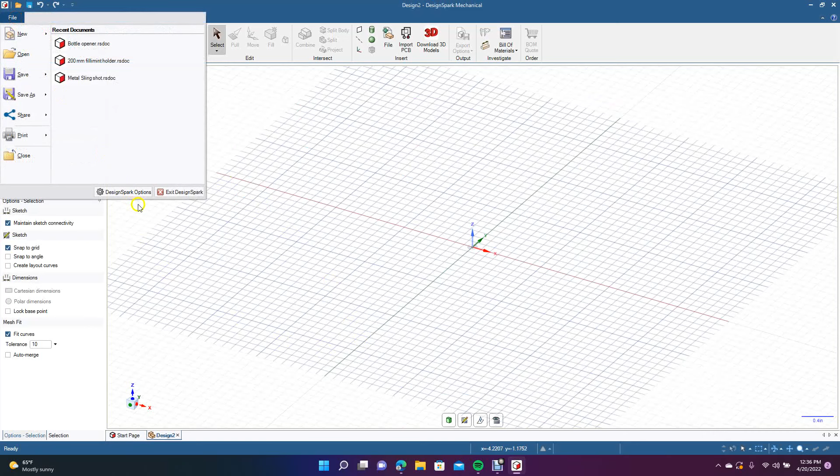Okay, so we're going to go ahead and create this in inches. We'll go ahead and go New Design. We're going to come up here, back to File, go down to DesignSpark Options. We're going to navigate over to Units and make sure that this says inches here, Imperial. So we'll go ahead and click OK.

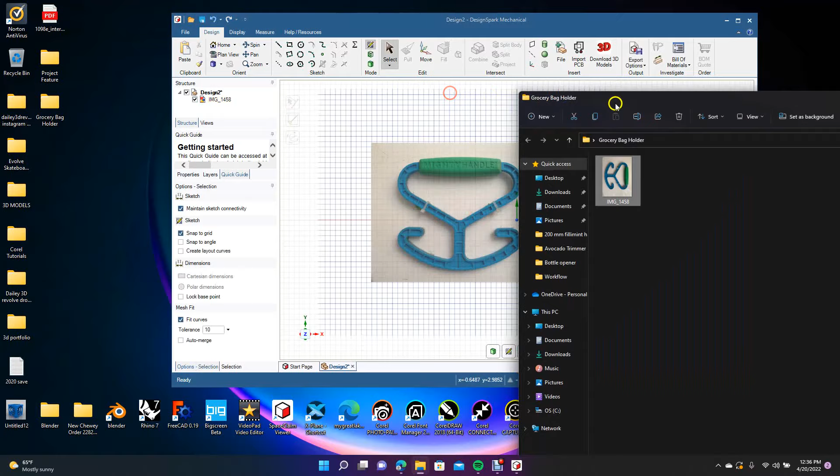We're going to click this eye icon, or V on the keyboard, to go to Plan View. I'm going to minimize. I have a photo of the one that I'd like to kind of use as a guide. I'll be taking measurements from this. Not going to make this exactly like this one, but it is going to be similar.

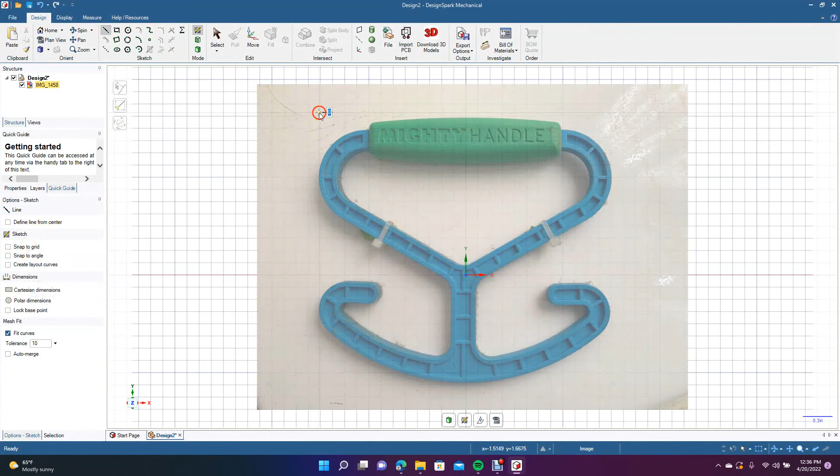Okay, we want this to be 5.75 inches from here to here. So we're going to go ahead and get a line tool. Let's turn off the snaps. And then we're going to go ahead and click there, and then we're going to drag out and type in 5.75. That's how big we want the handle to be.

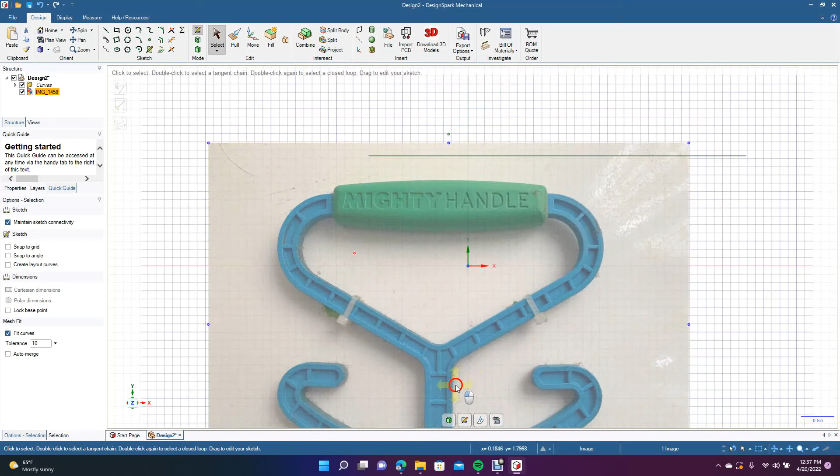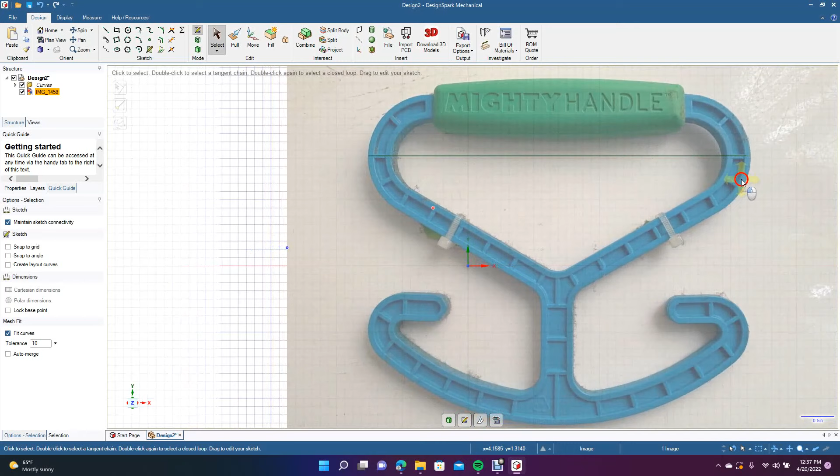So now we're going to click on the actual photo. We're going to come over here to the node on the lower right corner. We're going to click, hold down Shift, and we're just going to drag that out so it's close to the size that we need it to be. Okay, need to be a little bit bigger, so we'll click, hold down Shift, drag. Now make it a little bit smaller. Okay, I'm okay with this.

So go ahead and get rid of that reference line. We're going to click and drag this close to the center there. Click off of it. We're going to go Control minus on the keyboard to zoom out.

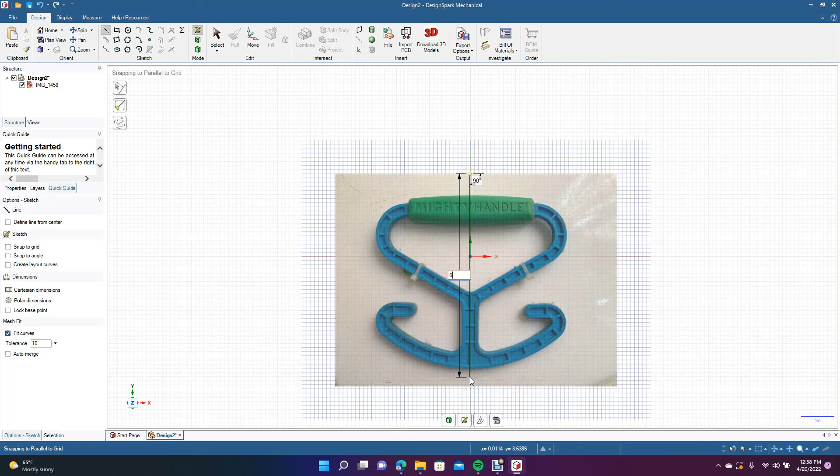We're going to go ahead and get our line tool. We're going to come put a line in here, straight down the middle. Doesn't matter what size, but if you're following along, we can go ahead and make that 6 inches. And then we'll click, select, click off. Now we're going to right mouse click on that line and set as mirror. Now we'll Control plus. Go ahead and get our pan tool.

So what we're going to do is go ahead and just start recreating this. Thinking it's just going to be best if we use a line tool. So we'll go ahead and start there. We'll go ahead and go...

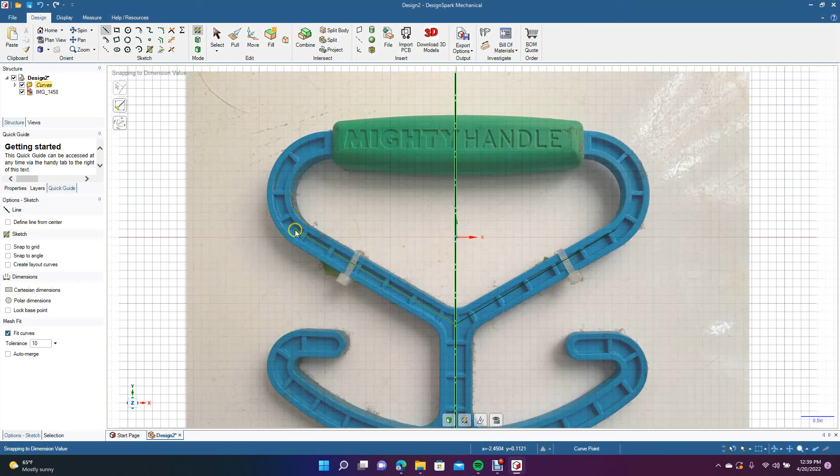2.827. Then we're going to click there, 2.827, enter. And then we're going to come straight up to here, top, which is going to be 1.328. And we'll click there. Then we're going to come across to here. Okay, now we have the start of this.

So now what we're going to do is go ahead and get our 3-point arc. We're going to go from end point there to end point there. And then we're going to curve this a little bit. This is going to be 112.9 degree, and the radius of 0.797. So we'll hit enter there.

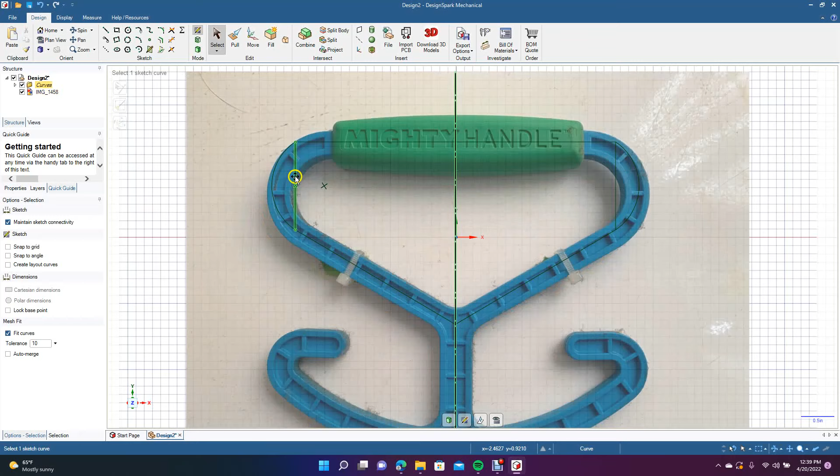Select, click off. And go ahead and get rid of this line here. Don't need it. We're going to add one more 3-point arc line. So we'll go ahead and grab that 3-point arc. We're going to come from this point here over to... actually, let's select, click off.

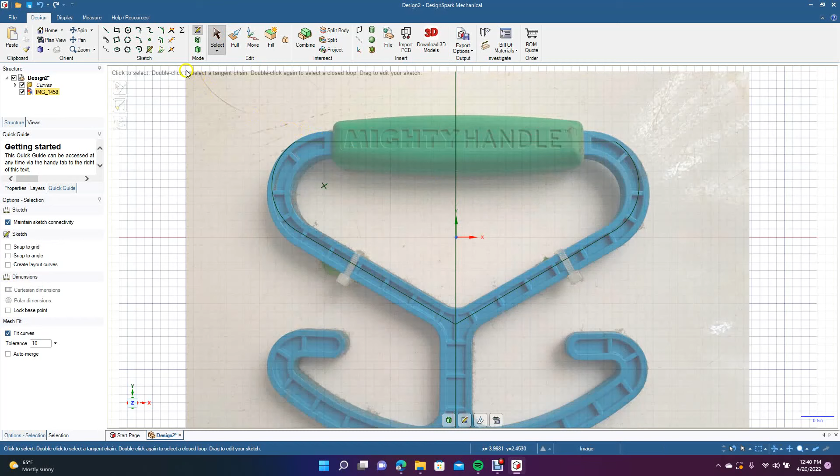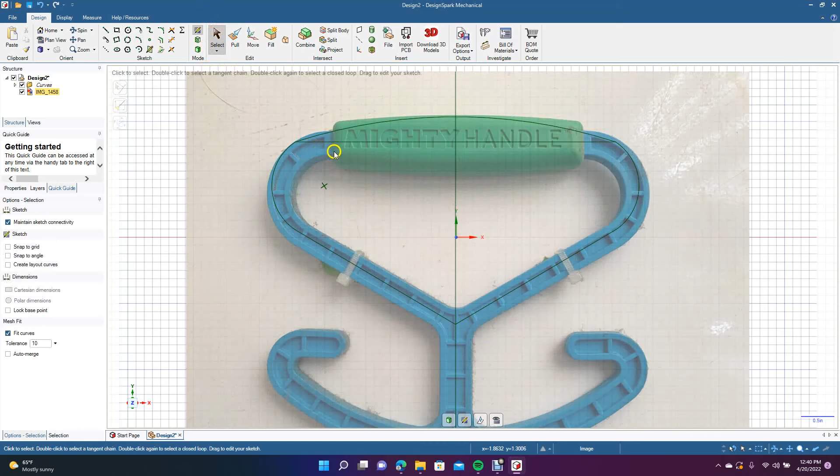We want to right mouse click on that and just turn off the mirror for now. Get our 3-point arc. We'll go from endpoint over to the endpoint of this. And then we're just going to arch that up a little bit. We'll have a little bit of a curve to ours. It's going to be 35.5 degree angle, and the radius is 8.004. We'll hit enter. And then we can go ahead and get rid of this line down here. Don't need those.

Okay, now we're going to go ahead and turn that back on the mirror. So we'll right mouse click, set as mirror. Now we're going to pan up.

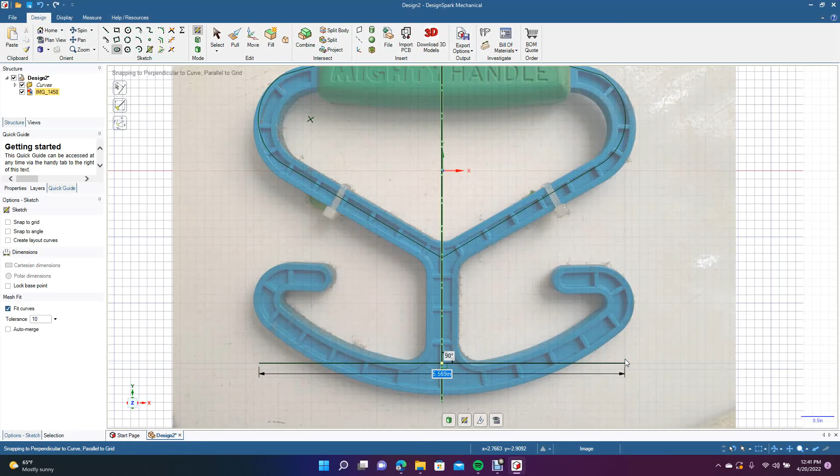Now we're going to go ahead and create this bottom part. The best way to do that is probably with the ellipse tool. So I'm going to go ahead and create an ellipse somewhere around here, just drag this out. 90 degrees, and we'll go 5.6 - type in 5.6, enter, and then we're just going to drag up.

We're eventually going to move this, so we'll go ahead and go to there, which is 5.6 and 2.798. So we're going to go to move. We're going to select that circle that we just drew and drag that up. Right there is probably good. Select, click off.

Now we're going to go ahead and put a line in here, from right there across. Select, click off. We're going to get our trim away tool, which is this trim away up here, or T on the keyboard, and then we're going to go ahead and get rid of these. Don't need those.

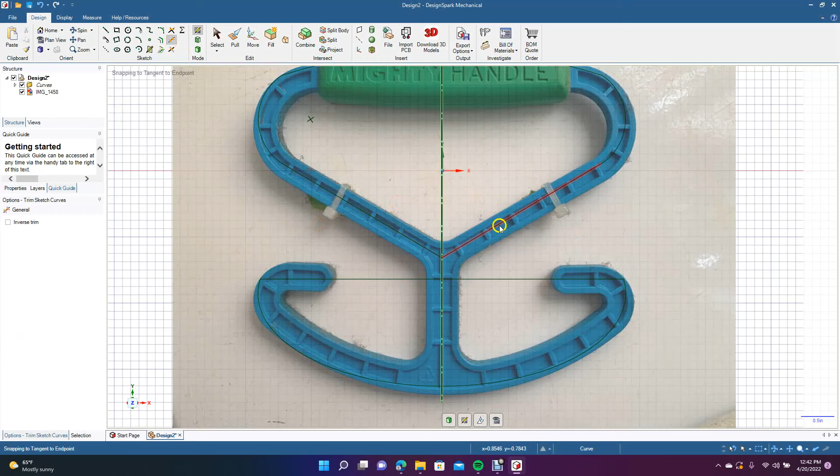Okay, now we're going to go get our 3-point arc again. But before we do that, just click on this line again and turn off set as mirror. And then get your 3-point arc. Now we're going to go from here over to the end point there, and then we're going to curve this a little bit.

I think that's good there. Select, click off. I'm going to get rid of this middle line here, so delete. Okay.

Now we're going to go ahead and let's put another line in here. So we'll go ahead and grab a line there. Actually, let's undo this. Undo. Okay, go to there. Select, let's click on that line there.

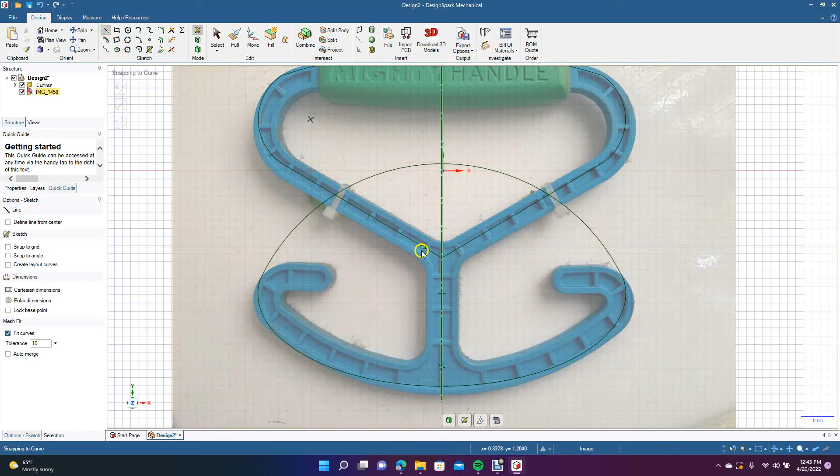Right mouse click, set it as mirror again. We'll get this line to line here, and we'll come from there straight down. 1.921 inches and 59.6 degrees. So we'll go ahead and select, click off.

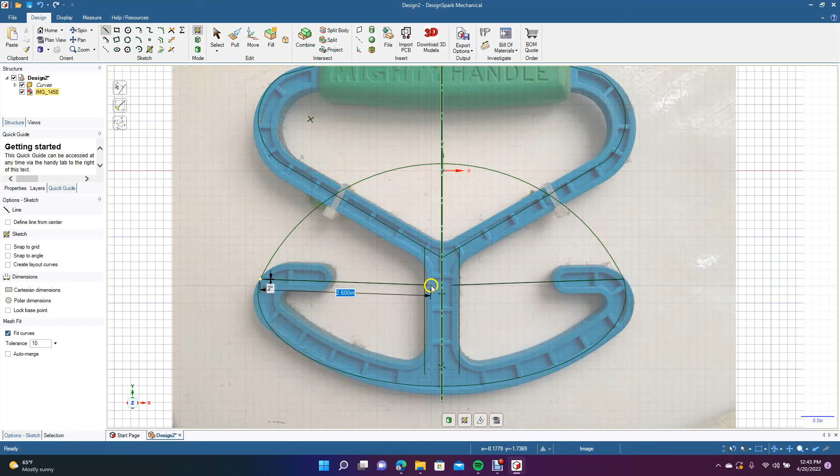All right, now we're going to start actually doing some of the work. So we'll go ahead and put a line from there over to there. We're going to get our trim away tool. Let's trim away this up here. Don't need that.

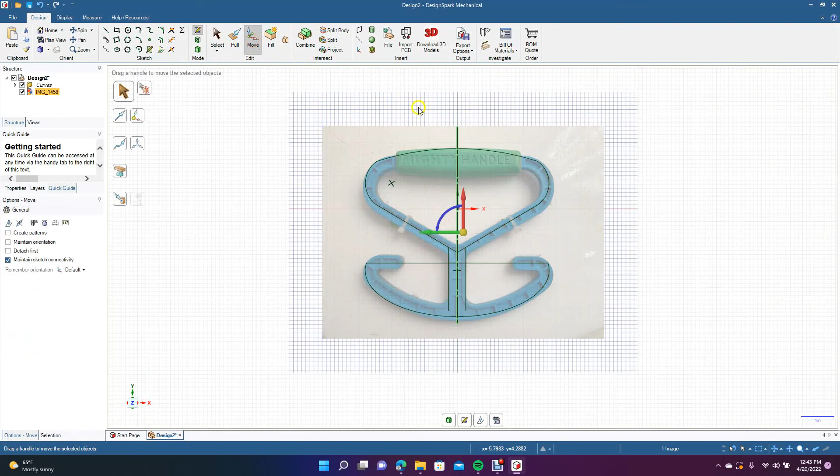Yeah, okay. Now we're going to go ahead and let's Control minus. Let's move this out of the way. So we'll click on the actual graphic, hit move. We're going to grab this green, just drag it over.

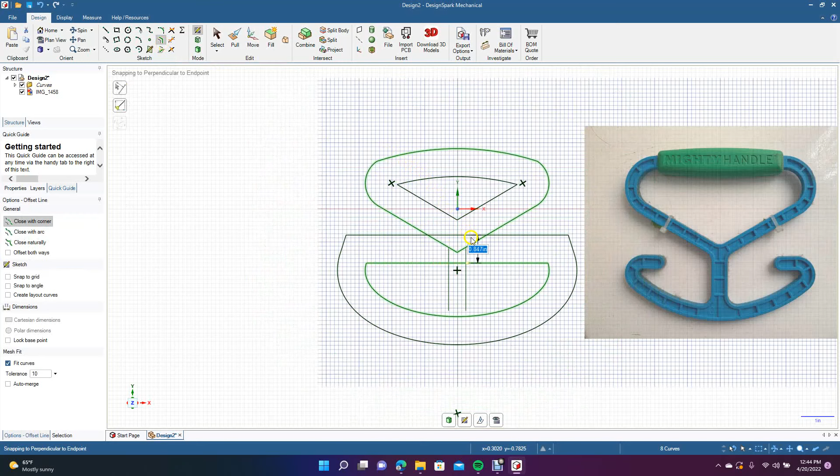Okay, now we're going to get rid of this mirror line. We don't need it. Now we're going to go ahead and select everything, and then we'll deselect these two lines here by holding the control key down. We're going to come up here to offset. Okay, and then we're going to offset this. I think an offset of 0.4 would be good. So we're going to type in 0.4, hit enter. Okay.

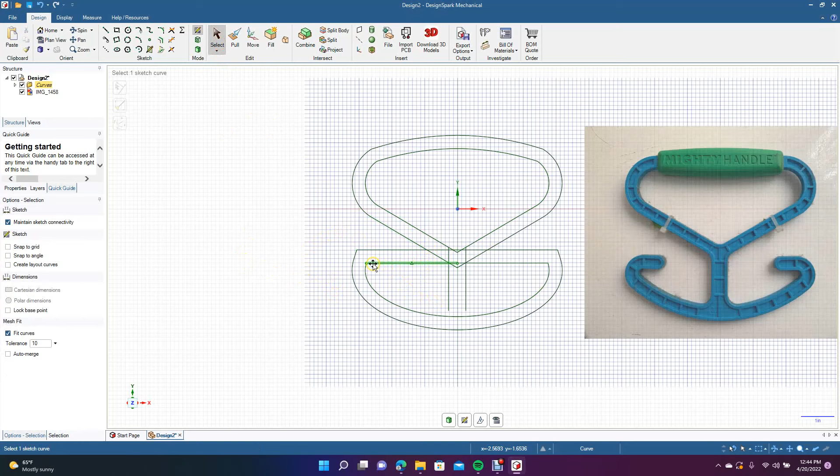All right, this looks pretty good right here. So what I'm going to go ahead and do is we want a little bit of this piece here. So let's get our trim away tool. Let's start trimming away the stuff we don't need.

Let's undo that - you just undid one I needed. And these I actually needed too. So let's go back, undo. Undo back to here. Sorry about that. I accidentally deleted these lines here and I needed those.

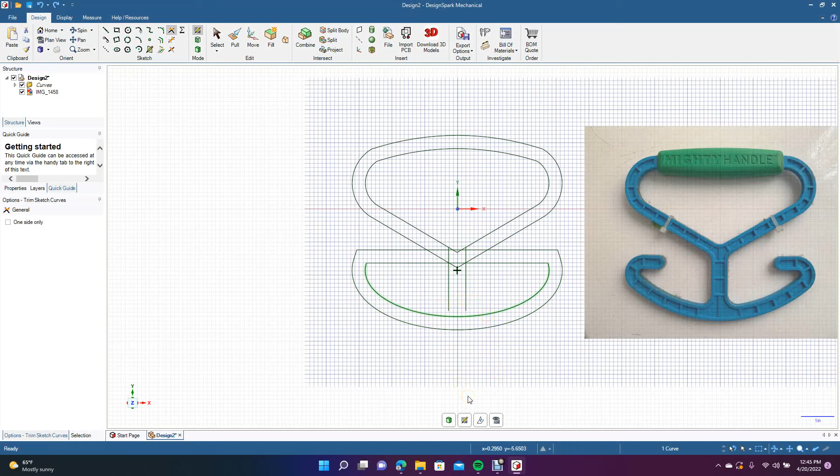So let's go ahead and go over to the create corner and then just create a corner out of this. I'll actually undo. Let's click start here to there. Oh, it looks like no matter what I do, I'm going to have to recreate those. So let's go Control plus.

I'm going to go ahead and delete these lines here. Let's hold down the Control key. I'm going to put a single line in the middle. We'll go down to there. Then I'm going to offset that.

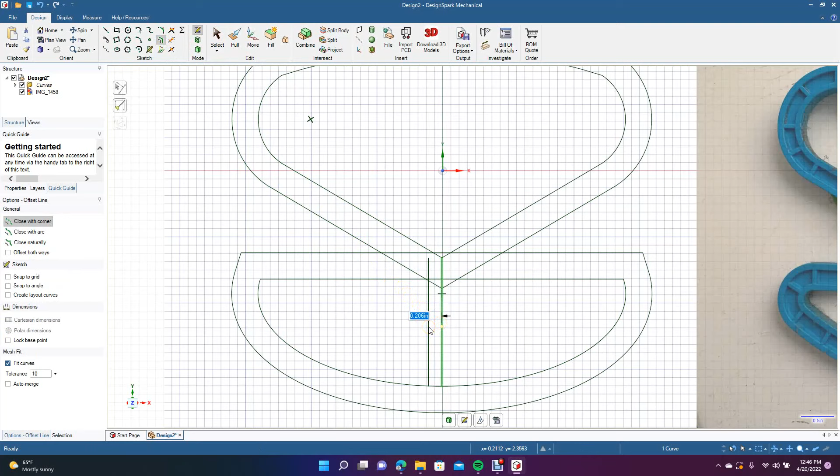So we'll go ahead and get the offset. Since we did 0.4, we'll drag these out to 0.2. Then we'll click on this one and drag it out 0.2 to the right. Okay, that looks good. Now I need a little bit of this stuff for the hook.

So I'm actually going to offset a line. So we're going to put a line right here, go straight up. And now I'm going to come over here. Well, let's put another line. So get the line tool, put one there. Straight up. Okay, now I'm going to offset that line.

How far I think it needs to go. I think it should probably go to 0.8. Okay, so we'll select, click off. Now we're going to go to offset again, and we're going to move this line here over 0.8. Okay.

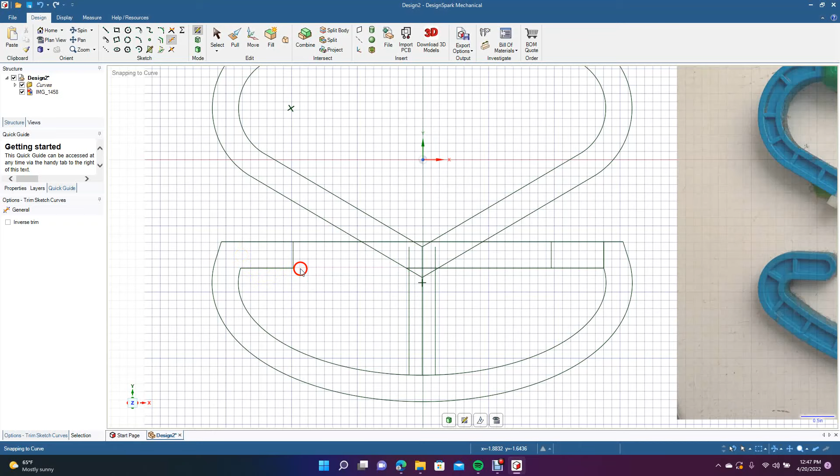All right, now we're going to go ahead and start trimming away stuff we don't need. So we'll go ahead and get rid of that. Get rid of those lines there. Get rid of that. Get rid of those two lines. Let's get rid of these.

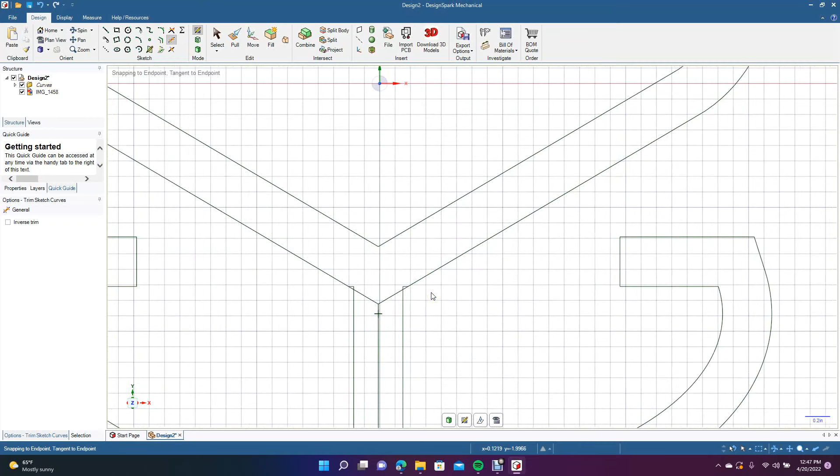Get rid of the lines inside. Let's Control plus so we see what we're doing. Let's get rid of those. Get rid of that middle line.

Okay, let's Control plus or Control minus to zoom out. See how we're looking here. So we got the handle part. Now time to put in some fillets. Let's get rid of that. Trim away.

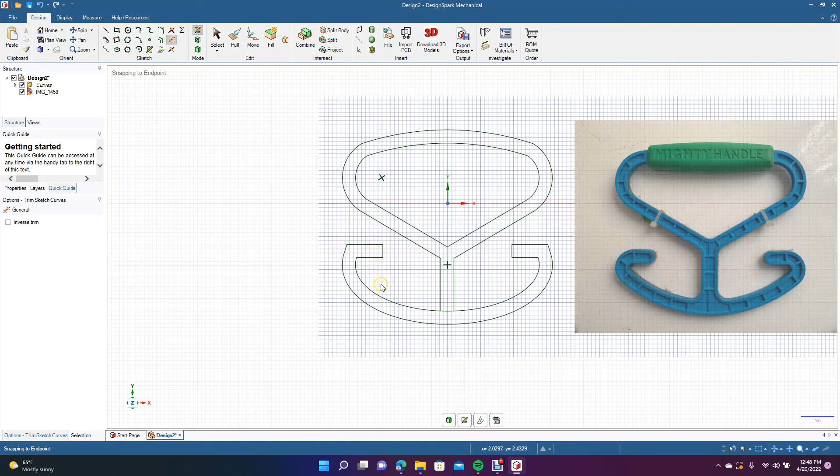Let's Control plus. Go ahead and get the create rounded corner. Let's round a corner there. Let's type 0.3. Let's do the same over here. Oh, 0.3. Let's put a little fillet in here.

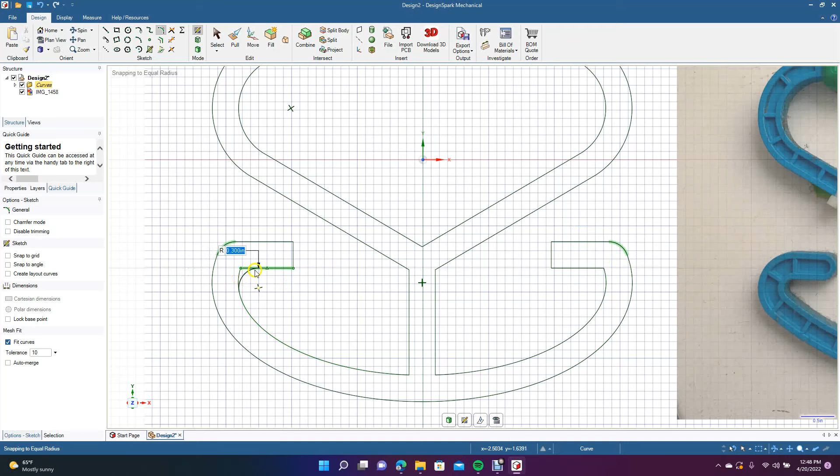Let's do 0.2. Same there. 0.2, and then let's round these corners. 0.2. 0.2.

Okay, looks pretty good. Now let's go ahead and get our rounded corners again. Let's round these.

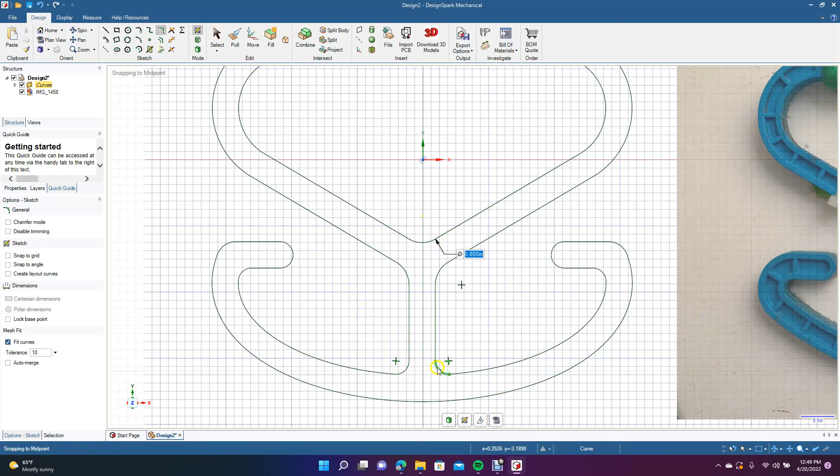0.2. 0.2. Let's put a radius in there so it's not sharp. Let's do 0.4 on that. And then let's go ahead and do the same on the other side. And then let's do one right here. 0.4. Okay, it's better for these corners not to be sharp because then they'll likely break.

So this is going to be basically our holder here. I like the way that this came out. We're going to add a handle to it, but we'll add that later.

Let's go ahead and get our create rounded corners. We're going to create a corner right here. Oops, undo. Rather than do that, I think I'm just going to delete that.

We'll come up here to the 3-point arc. We'll go from endpoint to endpoint. And then we'll just arch this up. There we go. Select the click off.

Let's Control plus. Let's pan over. I don't really like that. So let's undo. Let's go back to how we had it. That's going to work for now.

Let's go ahead and get our create rounded corners. See if we can create a corner here. Oh, 0.705. All right, I'm happy with that.

Let's go over here. 0.705, and let's do the same down here. 0.705.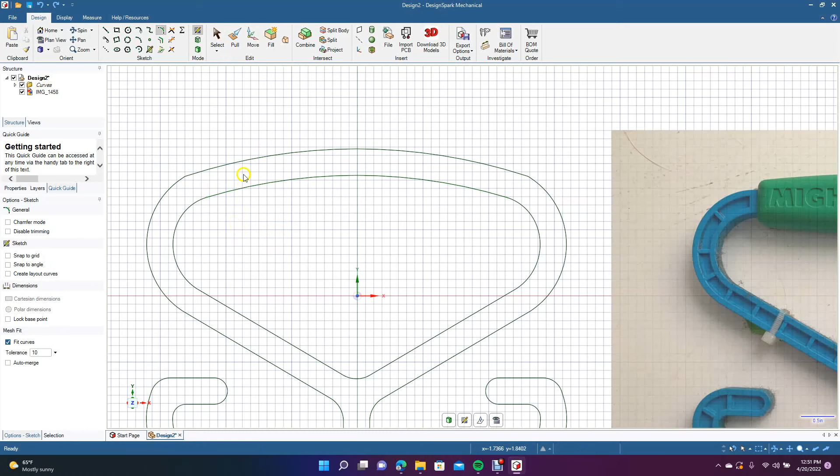Okay, that's not working out too good, so I'm going to undo that. Let's get rid of this top piece like we did before. So let's select, let's click on it, hit delete. Let's delete that little piece.

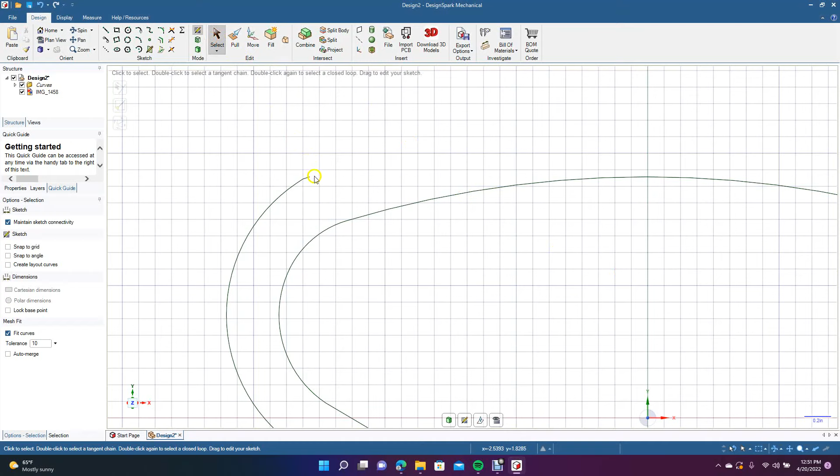Control plus to zoom in, let's pan over. Okay, I'm going to have to get rid of this little piece here, that's the problem. So click on it, hit delete, let's pan over. Grab the select, let's click on this, hit delete.

Okay, let's control minus. Let's get our tangent line, tangent arc from there. Okay, that looks pretty high up right there. See how that looks. Okay, that's a little bit better.

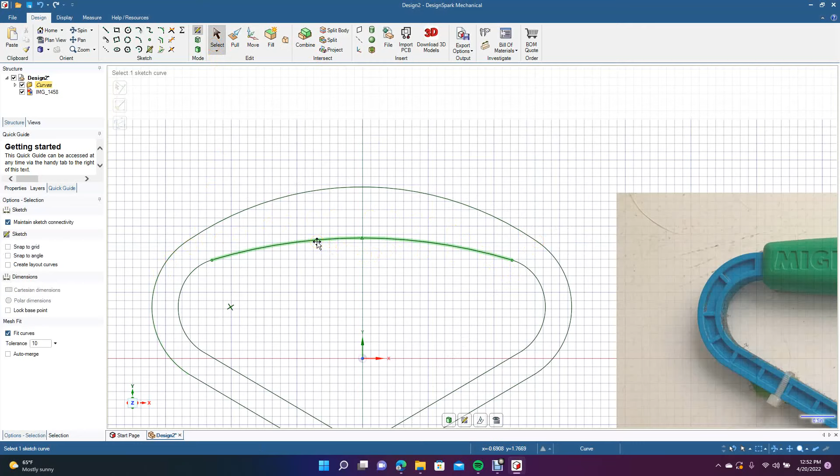So what I'm going to do is the same thing to the bottom. We'll just go ahead and delete that. And then I'm going to go offset. We're going to offset this line 0.4. Okay.

And then we'll go ahead and get rid of this piece here. That piece there. Let's see if we can connect using the create corner. Okay, looks like that's going to work.

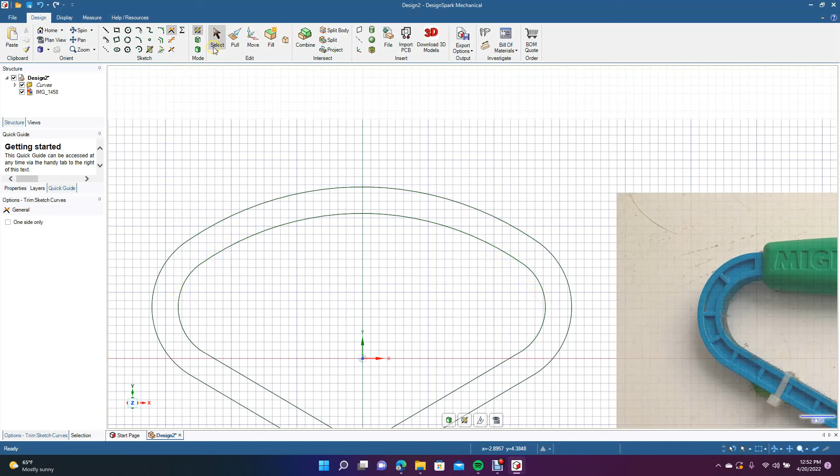Okay, now we're all done. We're all done with this part anyway. So control minus, that looks pretty good. We're going to make this probably about, got a tape measure here. We're going to go about 1/4 of an inch thick.

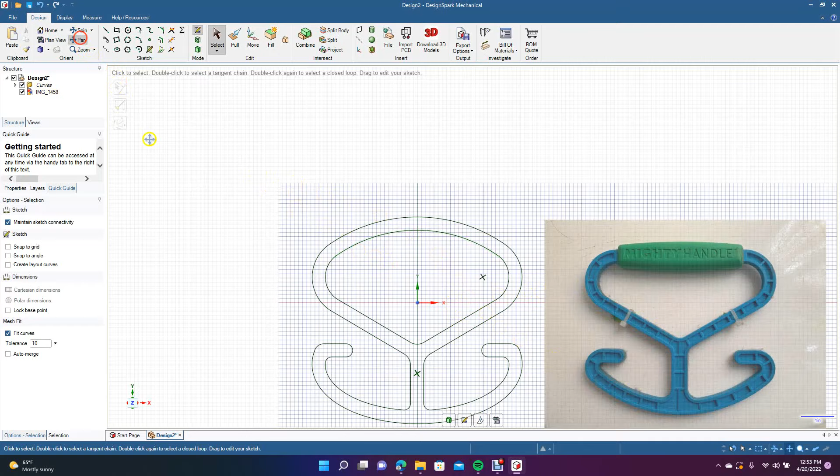So what I want to do, I want to add this rib in here so it's a little bit stronger. So we'll go ahead and pan up. Let's select everything. Okay, let's go ahead and go to offset.

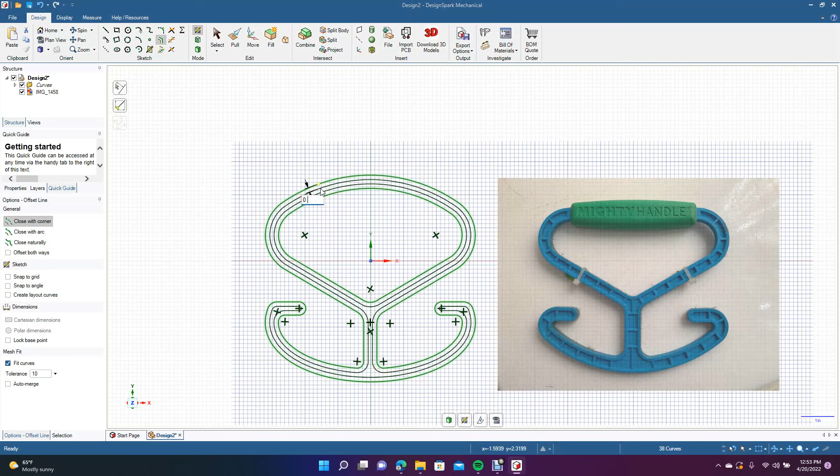And let's pull this in, so it creates kind of a rib. Let's just go type in 0.1. Okay, that's good. Now we're going to go ahead and go to the pull.

Let's spin this. I'm going to go ahead and pull this piece here. Hold down the control key and pull that piece there. We're going to pull from both sides, so go ahead and select that. And then we're going to type in 0.25.

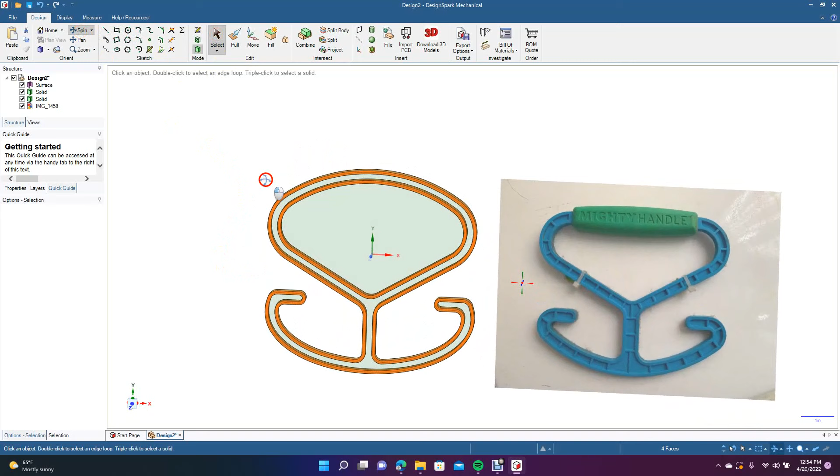Okay, let's see how thick we are there. Guess that's 1/4. Maybe make it a little bit bigger. So let's undo that.

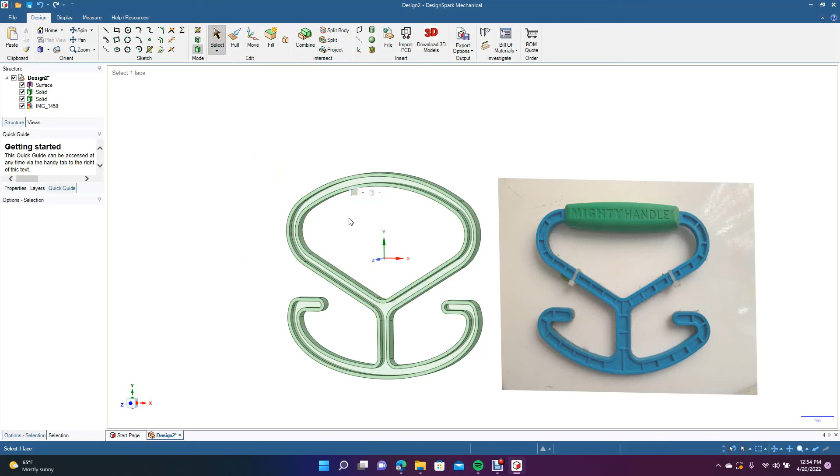One undo. Let's go to pull from both sides. Type in 0.3. Okay, let's select the click off. We'll go ahead and delete that. We don't need that. Let's control plus to zoom in.

Let's grab all that middle stuff, pull. We're going to pull from both sides, and then we're going to just pull this 0.2. Or actually, let's undo that. That's 0.15.

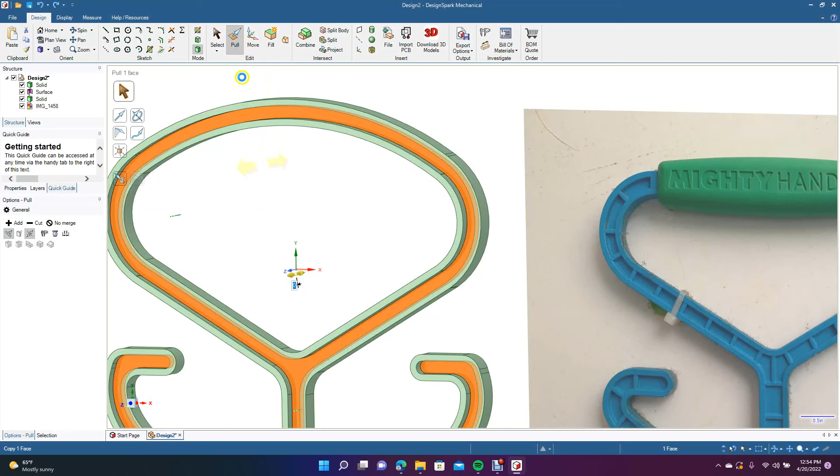Okay, that should work. Let's go select. Make sure we got this ribbing correct. Okay, that's going to be pretty strong on both sides, be able to hold the grocery bags. Let's control minus. Let's go ahead and go to top.

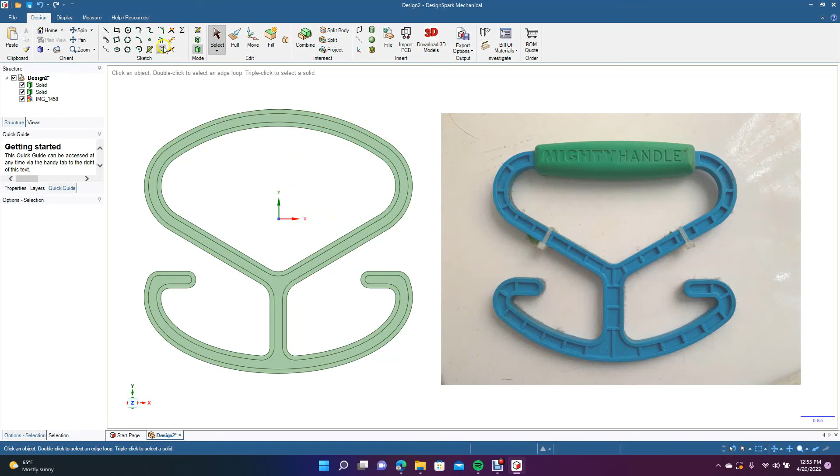Okay, now what I have to do is put a handle in here. So I'm going to go ahead and go to offset. Okay, let's offset this up, just go 0.2. That should be good. Okay, and then you're going to take the bottom one and you're going to type in 0.2.

Okay, now we're going to go 3-point arc. We'll just go from there to there. Whatever it rounds off to be, we'll just keep it that. And then we'll do the same on the other side. Okay, there we go. That's going to be our handle.

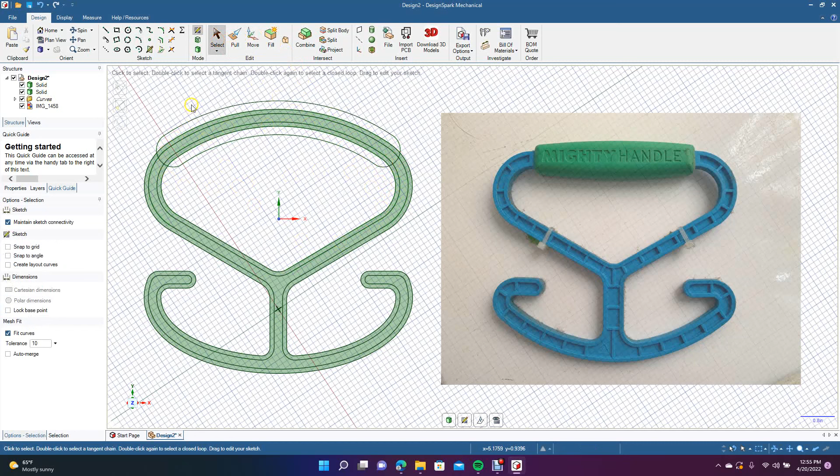Get rid of this, we don't need it anymore. Let's pan over. Let's go to pull. Spin this.

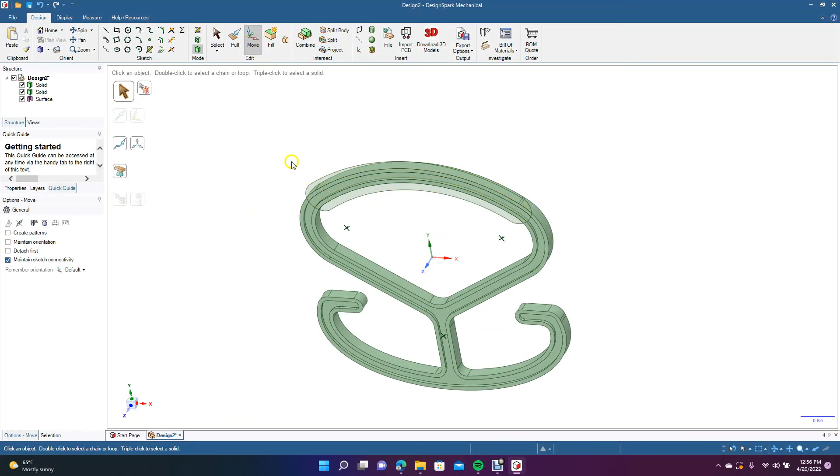This is not in the middle, so what I'm going to have to do is move it. Let's go ahead and go to move. Let's move it this 0.3, so 0.15, and we're moving it that because this is 0.3, so we're going to do half of that.

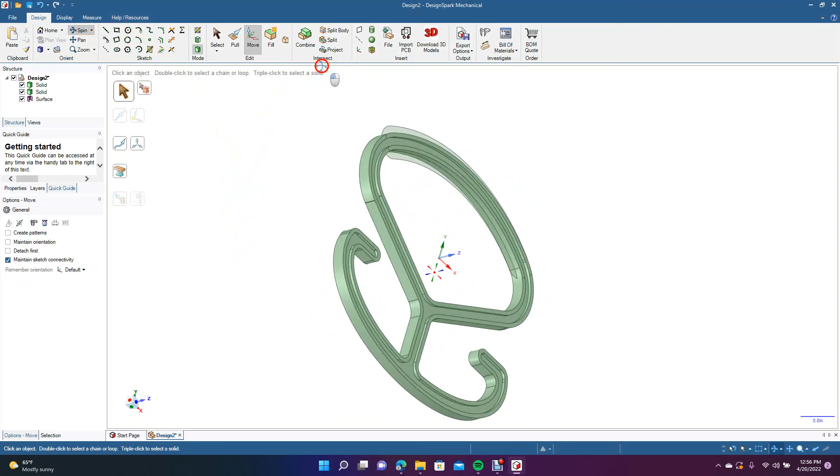So let's select the click off. Let's spin this. Looks like that's going to be able to be pulled. Or maybe not. Let's undo that.

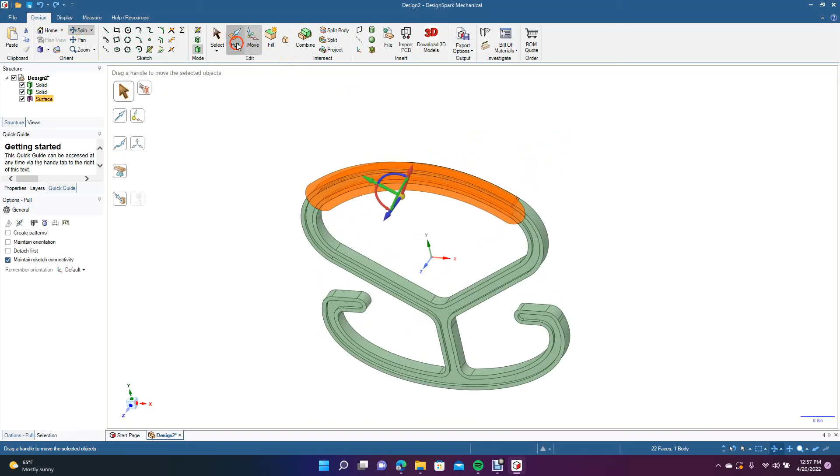All right, let's go ahead and spin this. Let's pull. Okay, this is not right. It's not coming out right. Let's go ahead and spin. Not sure what's going on with that, but let's go to pull.

Got all those pieces. Oh, didn't want to do that. Let's undo. Okay, let's go ahead and pull this.

Okay, let's pull this 0.2. Okay, now we're going to spin this. Now you're going to have to pull from this side.

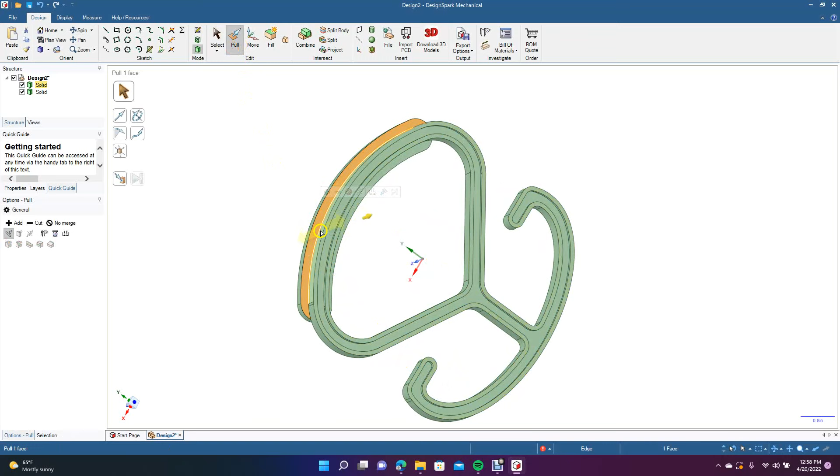Okay, let's undo that real quick. Let's go to pull. Can't really pull it from both sides, so you're going to have to move this. All right, as much as I didn't want to, you're going to have to.

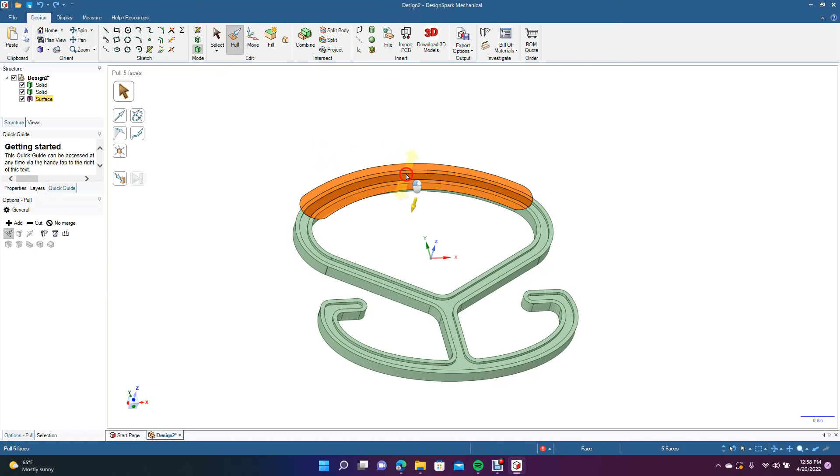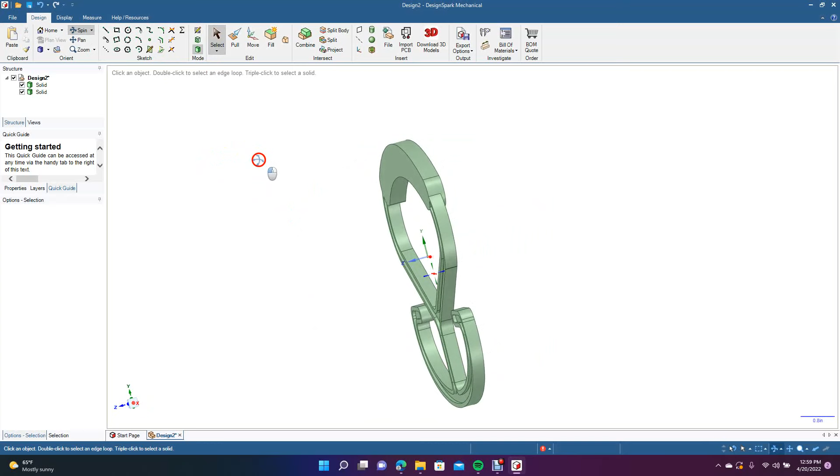Okay, let's go to 0.4. See how this looks. All right, let's go ahead and see if we can select just this.

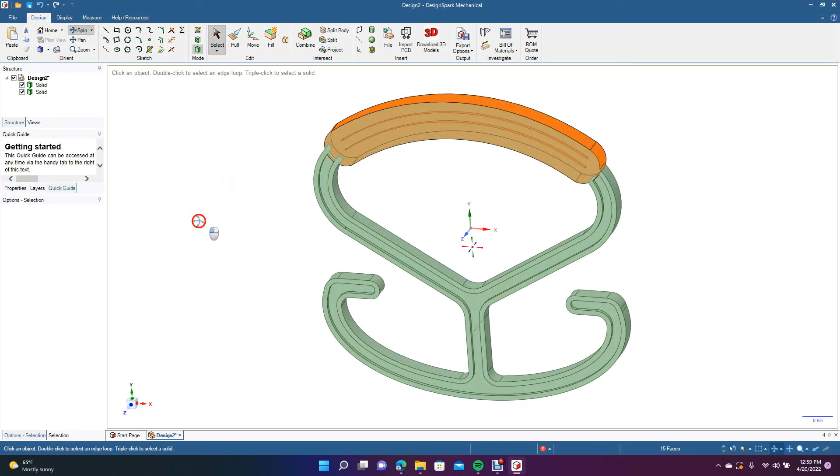Let's go to top view. Seems to be the only thing we're having a problem with right now. Go ahead and select that. Let's go to move.

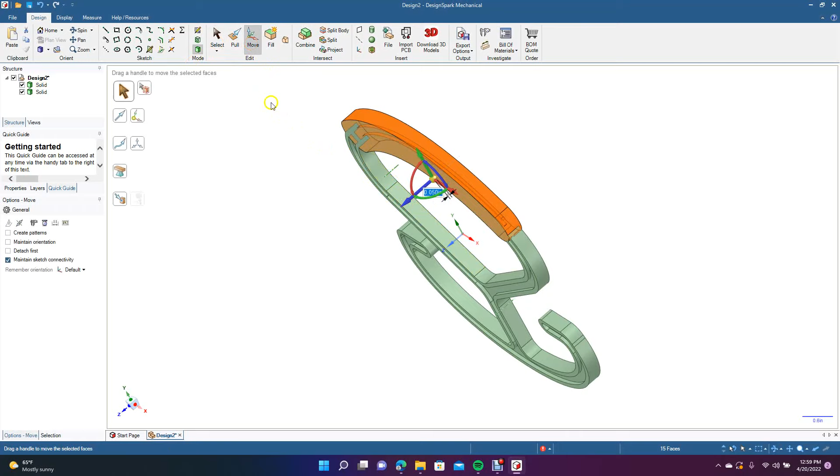Okay, let's pull this or move this. Move. 0.05. Okay. Let me spin this around, make sure it's okay.

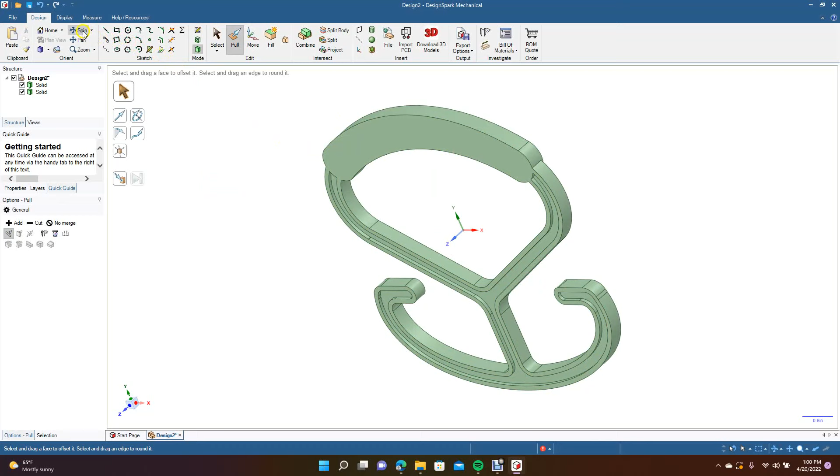It's a little bit bigger on the other side, so let's go ahead and pull this. Oh, that's all connected now, so we can't really pull that. Let's go see if we can move or actually pull this.

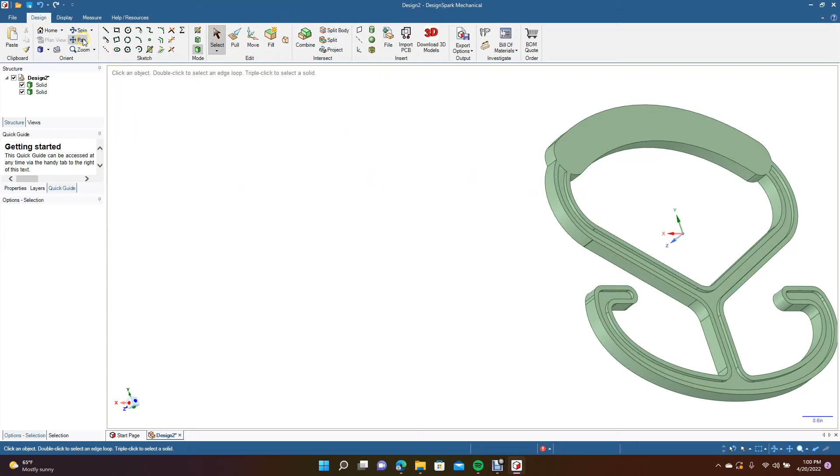Okay, let's go ahead and pull that. We're going to go to here and we're going to pull to this. There we go. All right, sorry that was so difficult. Should have been a little bit simpler than what we had to go through to get it like that.

Okay, so that looks alright. So the only other thing I want to do is go ahead and add a little fillet radius to this, 0.1. Do the same to the bottom there.

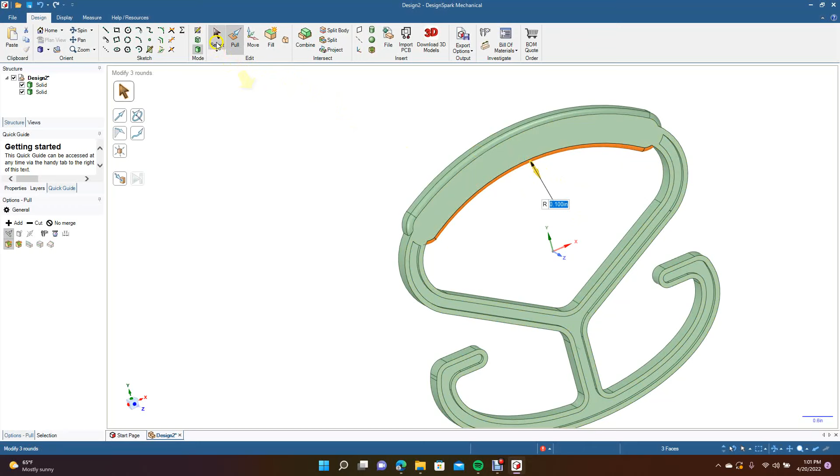Just select the parts that you need. 0.1. Just make it a little rounder so it'll be easier to hold. Spin this around. Type in 0.1 and then do the same on the bottom there. .1. Okay, that looks like that's a pretty good handle.

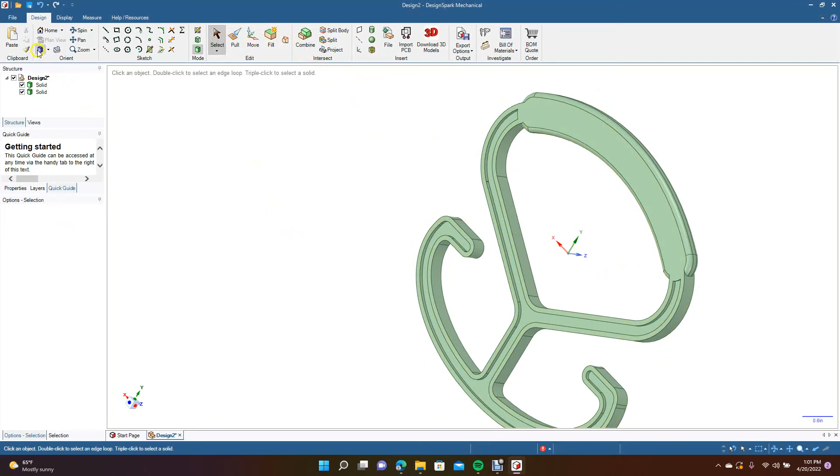Let's go to top view so we can view this. Let's go to the spin. The handle's not as thick as I would have liked it to have been, but I think that's going to work. Yeah, that should actually work pretty good.

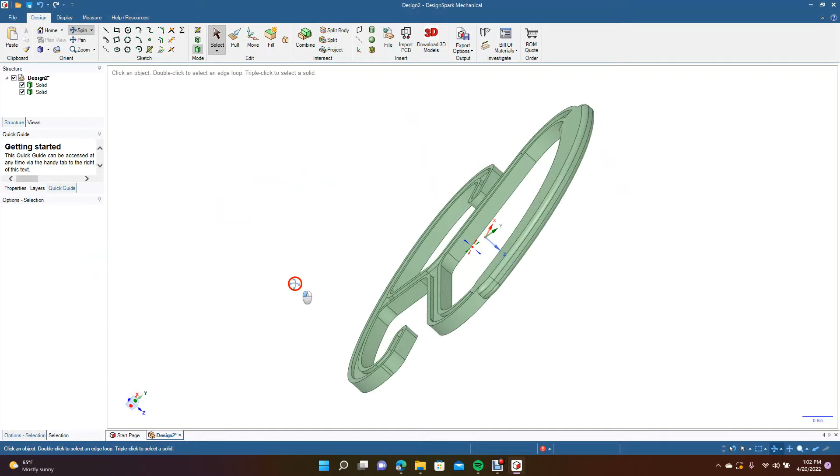You can just print this out. It's double kind of a ribbed, so it's going to be pretty durable. Won't likely break. I think if we could pull this, we would, but it's going to pull the whole thing. So we'll go ahead and leave it like it is.

So we're going to go ahead and go to top view. Okay, this is going to end today's tutorial. This is going to be our grocery multiple bag holder. You can go ahead and create this, and then you can print out one of your own. Okay, hopefully you enjoyed watching and you got something useful out of the video. Thank you again for watching.